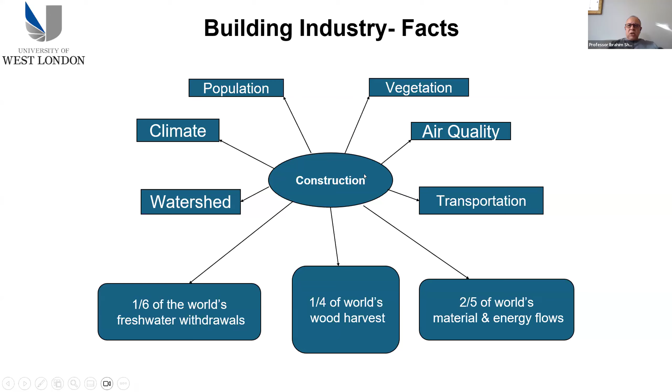What are our efforts towards sustainability and durability? I relate sustainability to durability because in civil engineering we work with construction, so we want to make sure we use sustainable materials and make our buildings sustainable and durable at the same time, with minimum maintenance for a long time. These are the facts about building sustainability and construction and related factors such as climate, watershed, transportation, infrastructure, air quality, and different sustainable materials used.

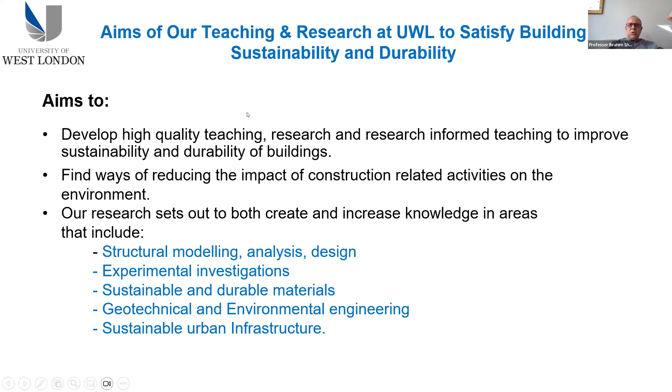Who are we at the University of West London? We are a group of teaching and research members in civil engineering. I'm happy to mention our teaching and research efforts. We aim to develop good quality teaching related to the sustainability goals of the United Nations, and we aim to do research using interdisciplinary approaches for the analysis and design of materials, new structures, experimental work, sustainable and durable materials, geotechnical design, and sustainable infrastructure.

We started this program in 2022 with just 3 students. Now we have 15 students enrolled this year, and some of these students on the MSc structural engineering program are PhD holders and chartered surveyors.

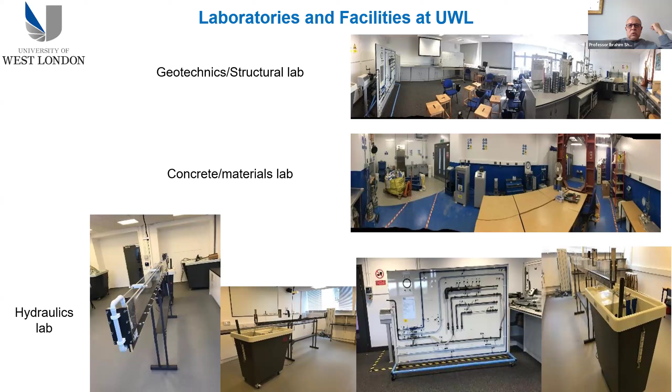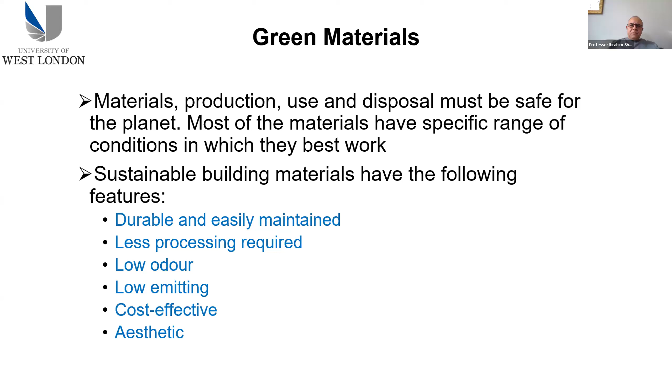We aim for this to address many items related to the United Nations Sustainability Development Goals, and mainly we concentrate on reducing carbon emissions and optimizing the use of our resources, using waste materials in construction rather than increasing the carbon footprint by leaving these waste materials without use.

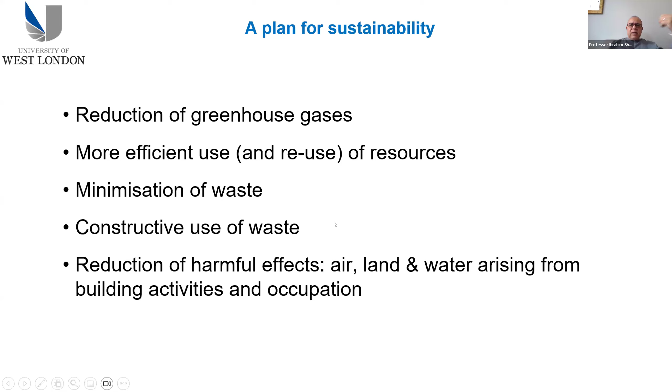This is the plan of sustainability for the research. As I mentioned, we concentrate on minimizing waste and the constructive use of waste in civil engineering construction.

This is the current research at University of West London towards sustainable and durable building construction, which is in line with the University of West London sustainability strategy.

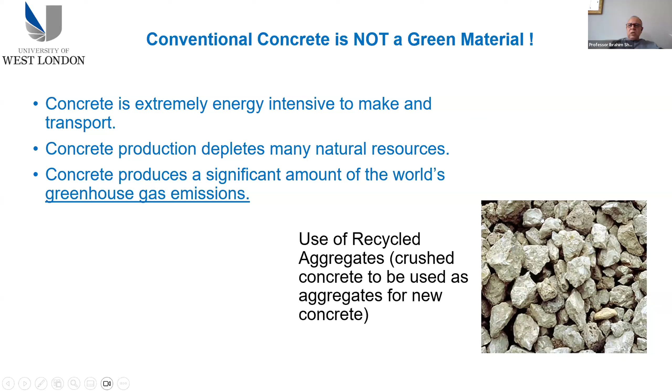We use recycled aggregates, recycled aggregate from crushing cubes from the demolition of buildings. We crush this aggregate and reuse it, so we don't waste aggregates, for our undergraduate or postgraduate students. When they use the concrete, we can crush the cubes again, and we have special tools to get the crushed aggregates to be reused.

This paper was a collaboration with our colleagues from the German University in Egypt, University of Liverpool, and Kingston University.

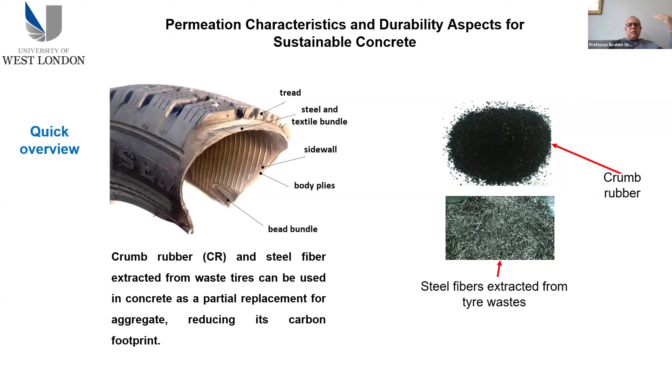We dealt with crumb rubber from old tires and waste steel fibers to be used in concrete at different percentages. We tried to optimize the percentage of crumb rubber and steel fibers to obtain durable concrete. By durable concrete, I mean concrete with minimum cracks and a narrow pore structure to make it impermeable. Impermeable, or less permeable, means fewer harmful agents can attack it, resulting in better performance.

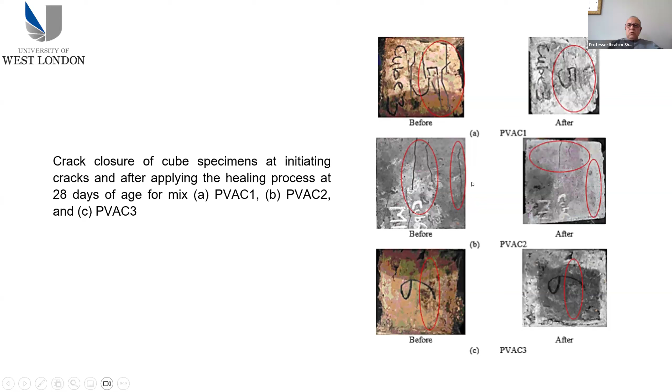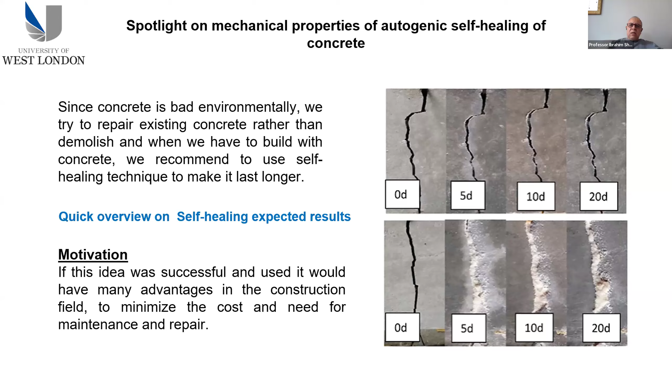This is the concrete before and after curing for several days of wetting and drying, which simulates the heavy rains our infrastructure in the UK is exposed to most of the time. So self-healing concrete will be a good solution. I'd like to mention that we can also inject existing concrete with self-healing agents to reduce cracks, not only in new concrete mixed with self-healing agents, but in old concrete as well.

This last topic is the in situ assessment of concrete elements. I was just talking about self-healing, cracking, and using waste materials - how do we assess the concrete compared with control concrete or concrete elements without any additions? Normally in the lab we use a crushing machine, the compressive testing machine, but there's also a short portable apparatus I developed in the lab.

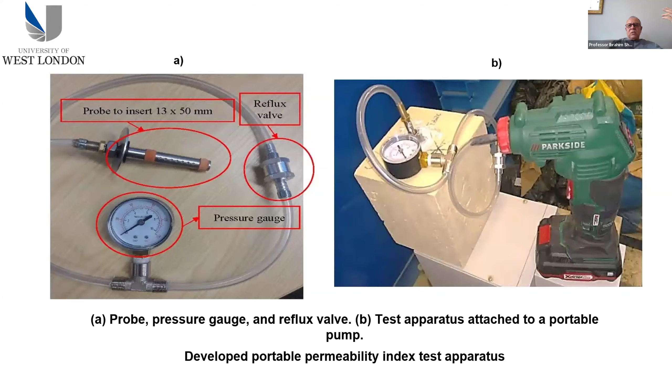This is based on assessing the impermeability or air permeability of concrete using a special tool. You can carry this out in the lab or in situ to assess the condition of concrete - quick, non-destructive testing to assess concrete quality on site. Thank you very much for listening.

Thank you so much, Ibrahim. I'm always impressed with somebody who's got more letters after their name than actually have letters in their name. So well done for that.

Interesting stuff. I mean, obviously living in Brentford, we are living almost under the flyover, which has got the concrete cancer. And they've been working on that for the past - feels like it must be the past 15 years, or at least 10 years, but it seems longer to me. Thank you so much, interesting insights.

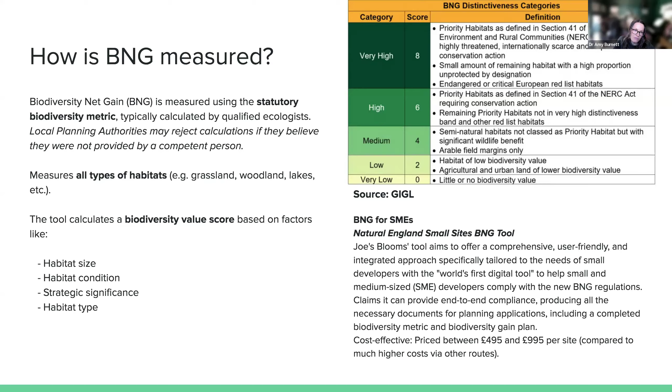I'm going to skip over this quickly because I don't want it to be the focus of the presentation, but essentially the metric looks at things like habitat size, habitat condition, strategic significance, and habitat type, which generates a score that can then be traded and purchased by developers so that they can build and get approved by the local planning authority.

How much time have I got left?

Oh, Sally, I didn't hear, sorry. You've got about 5 minutes. Okay, brilliant, thank you.

At the assessment level there are different actors—ecologists, and the landowner, who's the one putting forward the site. There are also different measurement solutions: AI is coming in to inform biodiversity assessments, there's something called AI Dash, feel free to look into that, but there's also a boots-on-the-ground approach. Then you've got the actual development planning, where you put together the application and the BNG plan.

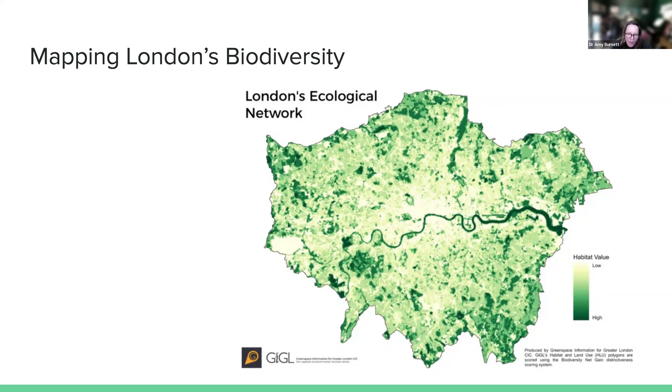I'm assuming, I might be wrong, but I don't know if this is the Heathrow area. I may be completely wrong about that, but I think this would be a very good map for businesses to look at collectively with the Chamber of Commerce, GIGL, and the London Borough of Hounslow, to really think about solutions outside of BNG as well.

Just to quickly tell you what's going on in London: you've got the London Plan, you've got the urban greening factor, which is trying to create space for nature in new development. You've got local plans incorporating biodiversity net gain policies, for instance biodiversity action plans. The GLA is also involved in a London-wide local nature recovery strategy, and GIGL is trying to look at a London offsite register, which would complement the national offsite register as well.

I haven't really got time to talk about this, but GIGL is trying to do lots of stuff around measurement of environmental assets, essentially, and there's lots of opportunities to get involved with what they're doing. For instance, they're trying to ascertain biodiversity hotspots for planning, which can help developers and businesses understand how they can contribute in their local area to addressing particular hotspots where biodiversity might be poor.

They can provide data search reports, which could be really good for businesses and SMEs to support their understanding of what is in their area in terms of biodiversity and how to feed that into their business.

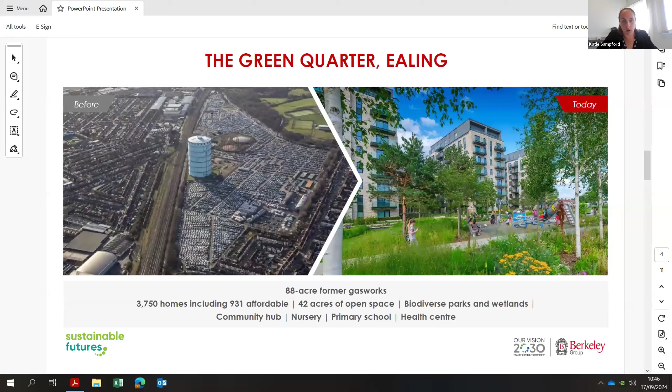There's going to be 3,750 homes with some commercial space and public amenities, and 50% of our site will be dedicated to open space. So with Amy's map of the green, hopefully we're bringing a bit more greenery to Ealing than there was before.

Phase 1 in particular is our phase that recently completed in 2019. It comprises 623 homes spread across just over 9 acres, and 30% of those homes are affordable housing. The photo on the right is of part of Central Gardens, which is the play park.

We also have an amphitheatre and a 600-metre water feature that runs through the site and will continue as the landscaping progresses. The Central Gardens is 1.5 acres of park with 804 new trees, and all of the homes are built with sustainability in mind as well.

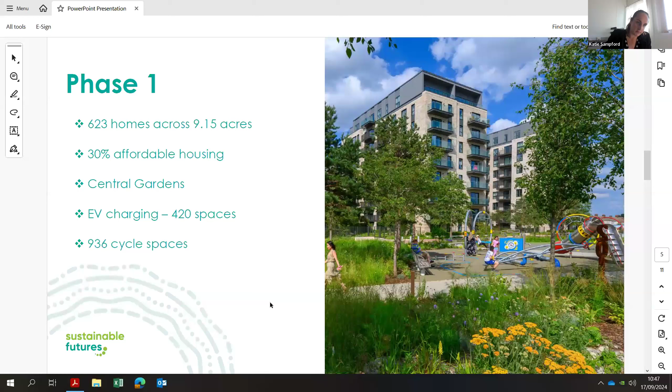So we have a fabric first approach. We install only the top efficient appliances. We have rainwater harvesting, which captures rainwater and is used for irrigation around the scheme and the landscaping areas. And we have an on-site energy centre as well, which is the heating strategy for the development, comprising heat pumps with backup boilers that supply each home. We also incorporate EV charging and cycle spaces as well.

We've also delivered Parkside Yard, which is our meanwhile community space. Because it's such a large development and we're not going to complete for a very long time, we want the residents and community to have something to use whilst we're constructing the commercial space.

So Parkside Yard supports 4 local businesses at the moment. We have Open Southall, which is a creative maker space, and they run various art workshops and different classes like chess, pottery, and all kinds of things like that. We have Southall Coffee House, which is a nice coffee shop and Italian restaurant, Yarn Tings, and Plant Life.

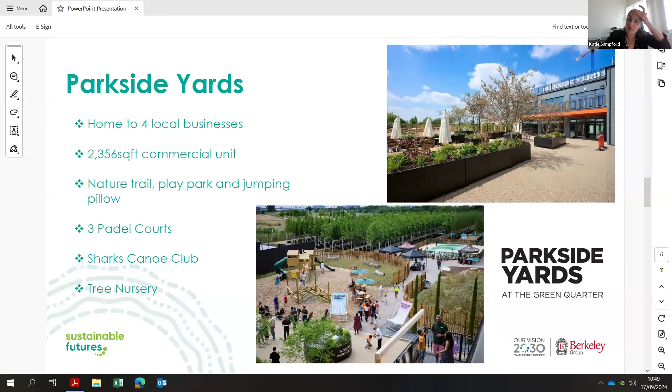We also have 3 Padel courts that we've recently opened as well that sit just behind this, that are open to the public and the community. We've recently partnered with Sharks Canoe Club as well, so you can access Grand Union Canal now, and we've partnered with them to deliver canoeing classes as well.

You can see we've got a jumping pillow and children's play space too, and then our wonderful tree nursery. The tree nursery houses 600 trees of 6 different species. The idea is that we're growing them locally on site, and then they will be planted in future phases of the scheme to help reduce transport emissions and improve local air quality.

We also use these for various community events and workshops. We've hosted yoga sessions, which I think we've got some next week. And then we also do schools events there as well.

Last year we had, and again this year, a 2-day schools event where we invited 4 local schools in, about 300 students in total each year. We get London Wildlife Trust in to do various workshops, and also Elite Landscapes to do plant potting as well, teaching children the importance of nature, about biodiversity net gain, and everything that we're trying to do at the Green Quarter.

I thought I'd go into a bit of what we do during construction as well, in terms of sustainability. A big focus is waste reduction. We've got various things - this is just a handful that we do whilst building to make sure we minimise our impact.

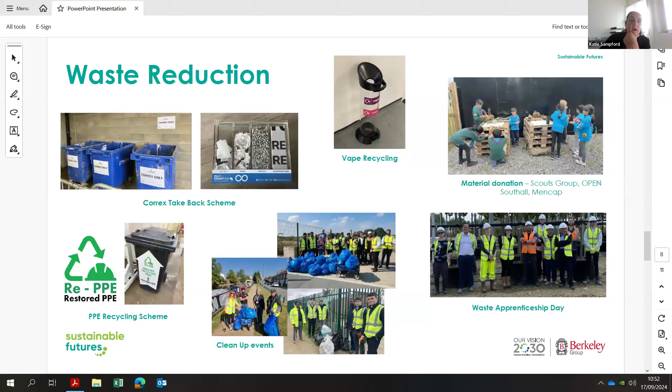We'll be carrying it out down near the canal on Saturday. And then we donate a lot of materials to various things. For example, recently we built some bug hotels with this local scouts group. We're looking to renovate a garden area for our charity partner Mencap, and we'll donate materials from site to that as well. And we did a waste apprentice day last year, so there was about 10 or 15 apprenticeships in waste management, and we took them on site to talk about the importance of waste and how to manage it well from a sustainability perspective.

For climate action, we use HVO biofuel, so hopefully you'll have some understanding, but it's essentially a much more sustainable option than diesel, with 90% reduction in CO2 emissions, because you're essentially burning material that previously absorbed carbon from the atmosphere. So it's almost carbon neutral if you think of it like that, as long as you're using a sustainably sourced fuel. So for phase 3, the phase that's currently under construction, we've used 95% HVO.

It would be 100%, but unfortunately one of our contractors delivered fuel incorrectly on one occasion, so it brought us down. But to date, we've used 147,000 litres of biofuel, and if this had been diesel, we would have emitted 461 tonnes of carbon. So we've saved just over 400 tonnes from doing so.

We also have a canteen oil recycling scheme, so our canteen oil actually gets sent to be turned into biofuel, not the biofuel that we procure, but it does get sent back into that supply chain.

We also have our bike hire scheme, so this is to promote sustainable transport within Southall and around the Green Quarter. It works like Santander bikes, people can just hire the bikes, and we have docking stations on the development and at the station.